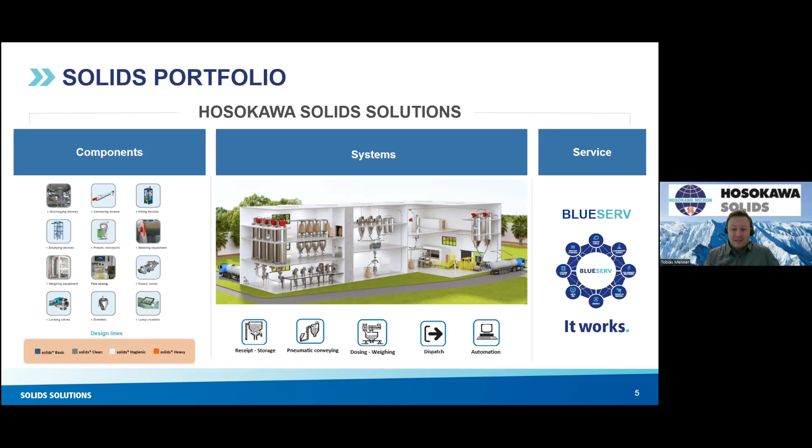So enough with self-advertising. Let's drop into the pneumatic conveying systems. Let me introduce our main technology here. What are pneumatic conveying systems and what types are there?

First of all, a pressure difference is needed, which generates a gas stream to carry or push the particles. A closed system causes a closed gas stream to transport the particles to their receiving system, and suitable bulk material, of course, is required, along with a destination where it should be transported to.

The conveying concepts differ mainly in the possible pressure difference, velocity, or loading degree - the number of particles in a specific amount of air. There are basically two different main types for pneumatic conveying: dilute phase conveying and dense phase conveying.

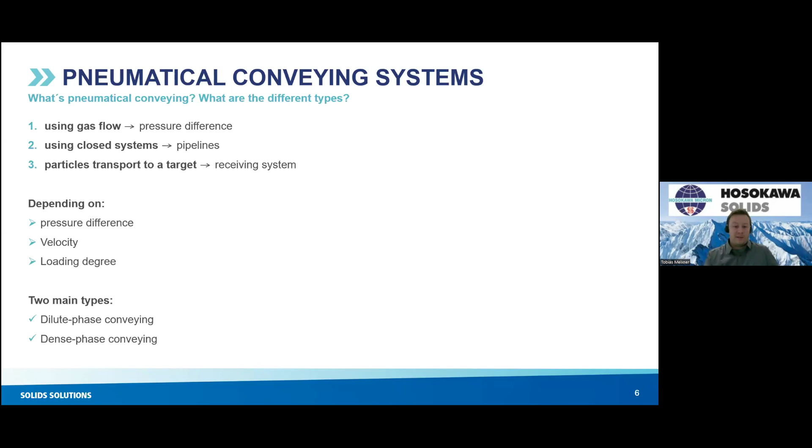Many things influence the decision for or against different conveying systems, such as bulk material properties: flowability, fluidizability, air retention capacity, wear behavior, and the fragility of grains, as example spray granules, pellets, or even friction-sensitive bulk materials. Also the ability for forming deposits or layers in the pipeline.

Also, the operating conditions can influence the decision on which system fits here: the specified mass flow rate, conveying distance, continuous or batch conveying, the batch accuracy especially in dosing systems combined with pneumatic conveying, ATEX regulations or requirements, and others like climate factors in Asia or outside a building.

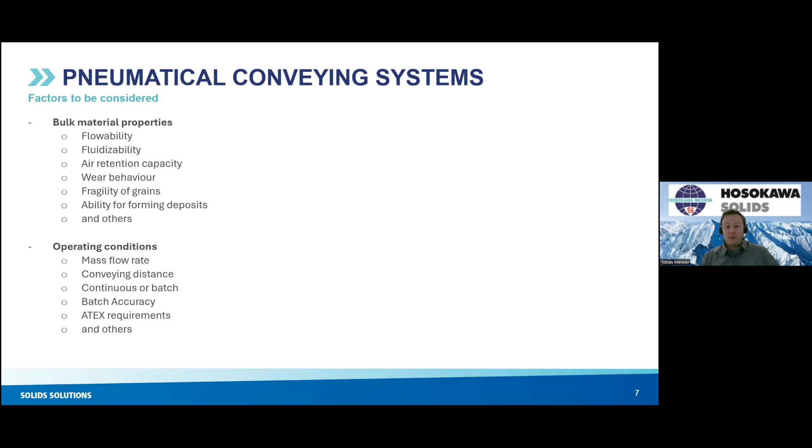For our pneumatic conveying systems, we have developed various conveying systems to meet nearly every requirement on the market. It is important to us to find out the real problems and to question them analytically. This may also result in concepts and solutions that deviate a little bit from these, which are then tailor-made for bulk goods, bulk solids, and customer-specific purposes, and are constantly being developed further.

I will fly over several concepts here and drop into three of them in the next slides. Our Solids Fly Pneu system is a classic dilute phase conveying system for vacuum and pressure operation, for standard conveying tasks, medium distances, and no special requirements to the conveying and the grain handling.

The Solids Fluid Pneu and the Solids Vacu Fill are for conveying of powders, for good fluidizable bulks, lower requirements to the handling, and for short to medium distances.

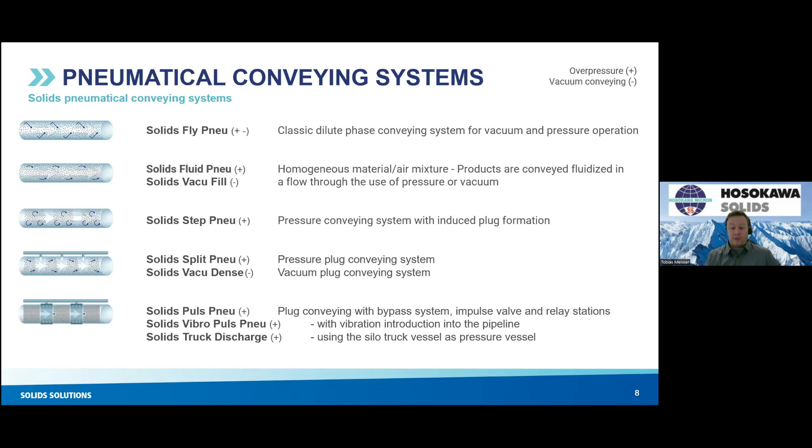In the following, I will explain the characteristics of three systems: the Puls Pneu system, Vacu Fill, and pneumatic truck discharge.

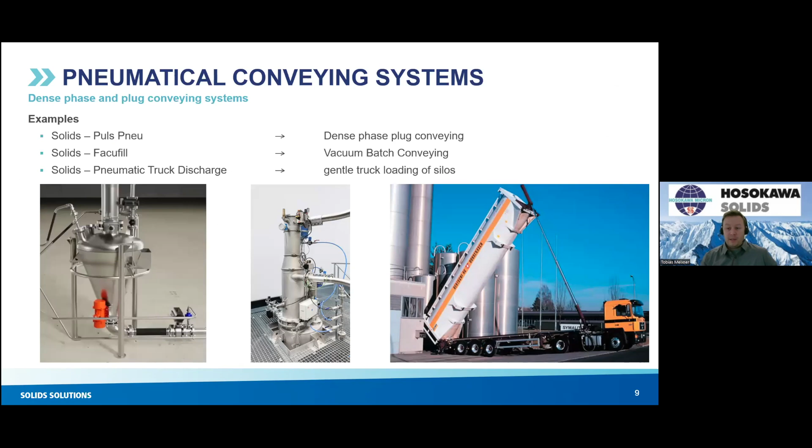As said before, we'll start with the Puls Pneu system with a shorter video. Our Solids Puls Pneu plug conveying system is fitting if gentle conveying is needed, and other special challenges are specified. In the following, the newly created video is perfect to take a look inside the system and explain how it works. I will start now.

The material or the bulks—I have to make this, otherwise I hear the music behind it.

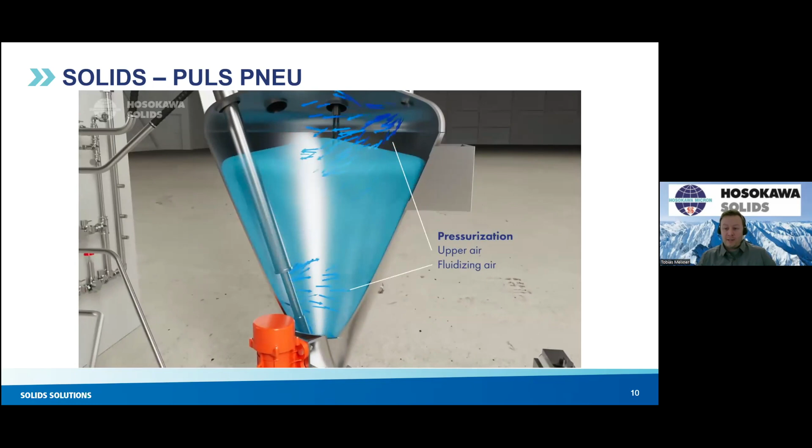Material is filled via the pre-system silo or hopper and through an opened pre-closer flap into a pneumatic sender vessel, which after filling is closed pressure tight. Air for fluidization and pressurizing is led into the pressure vessel, and the product will automatically begin to flow into the pipeline in a dense and fluidized mode.

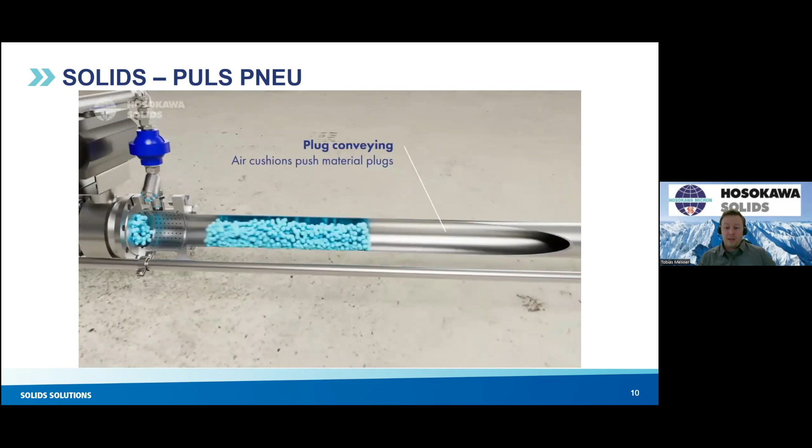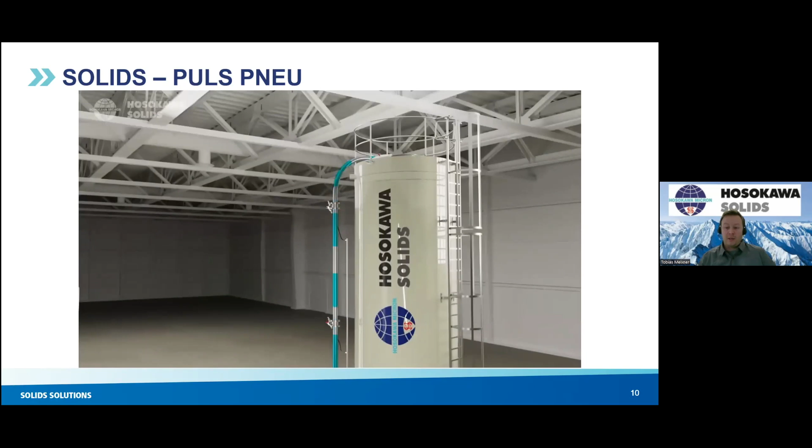An impulse valve here separates the product flow into material plugs and air cushions by a ring nozzle with pressurized air, and relay stations every 6 meters ensure that the air cushions keep the plugs separated and clogging-free conveying is ensured.

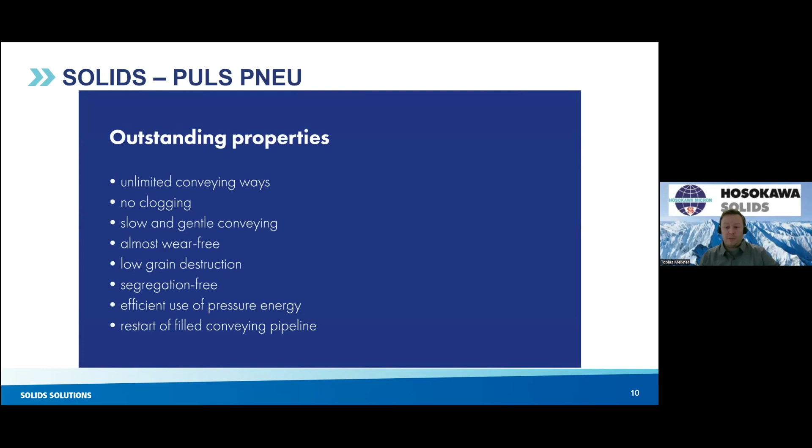The system comes with the following advantages: nearly unlimited conveying routes are possible; no risk of clogging or blocking of the pipeline; gentle and wear-free conveying, with nearly wear-free conveying by extremely low velocity of about 7 to 10 meters per second; segregation-free conveying for mixtures; and finally efficient use of the pressure energy with very high loading degree and use of pressurized air.

Also, the restart of filled pipelines after a stop, pressure loss, or emergency stop is possible with the Solids Puls Pneu system, thanks to the relay stations.

The second system, our Vacu Fill system, is suitable for short conveying lengths and products that can be easily fluidized or have to be conveyed gently or without segregation. Same task as before, but this is all in vacuum mode. The extremely low height of the feed system, in principle a small hopper with fluidization, is perfectly suited for low installation heights or lack of space.

The bulk material is sucked via vacuum into the conveying line via the feed hopper by fluidization of the bulk, and a false air valve divides the product stream into plugs and air cushions.

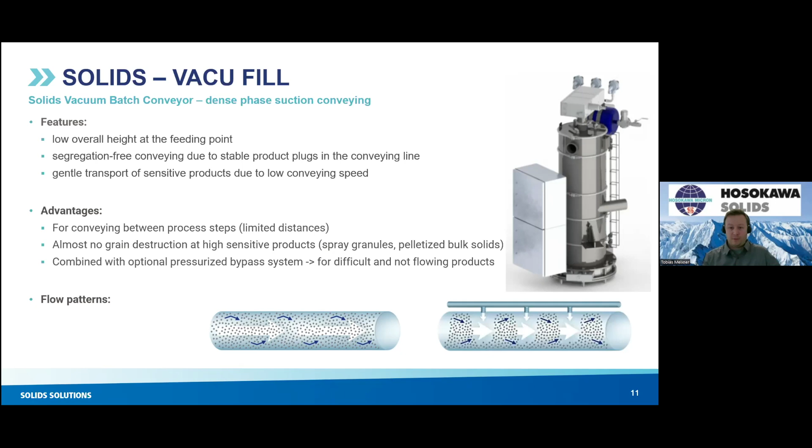The third system I want to introduce is our pneumatic truck discharge system for silo filling of bulk solids from trucks. The truck tank itself is used as a pressure vessel, and its function follows the same principle as the Puls Pneu system, but much bigger here.

An impulse valve and the silo filling line, as well as a secondary line with pressurized air and relay stations, are required for the silo filling line.

Segregation-free and gentle conveying, or the addition of dry air or nitrogen to the truck, is possible with this system, which is principally a pneumatic installation and pipeline system combined with pressure generation and, optionally if needed, an air dryer.

Sensitive bulk materials and hygroscopic bulk materials can be conveyed without grain destruction. This prevents the formation of fine dust between the grains and thus prevents the absorption of moisture and the recrystallization of hygroscopic bulks.

This is our solution we developed in the 1970s for urea handling, in German Harnstoff, which was not meant to be handled in silo storage until around 1970. We now have about 50 to 100 systems worldwide in perfect operation without problems. By continuously flushing the silo line with dry air when not in use, the line is kept dry and the silo head is protected from condensation at the same time. So this is the main task we have to solve here.

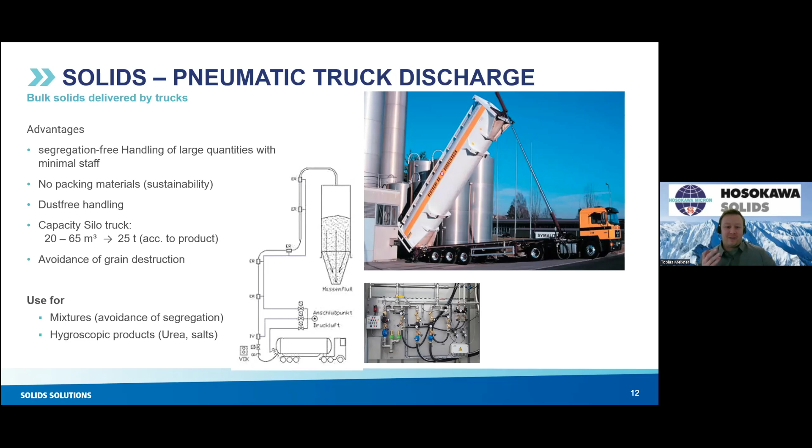Because of the time, I had to shrink my presentation very much, so I could only step into three of the systems. In the end, I want to point out again that all of the briefly explained systems are only one solution for one task at one bulk handling challenge. We will analyze all details first and engineer a perfectly fitting solution for your bulk solids. If you have any questions for me, use the remaining time to clarify this.

That was my presentation for this time. Thank you very much, Mr. Meixner.

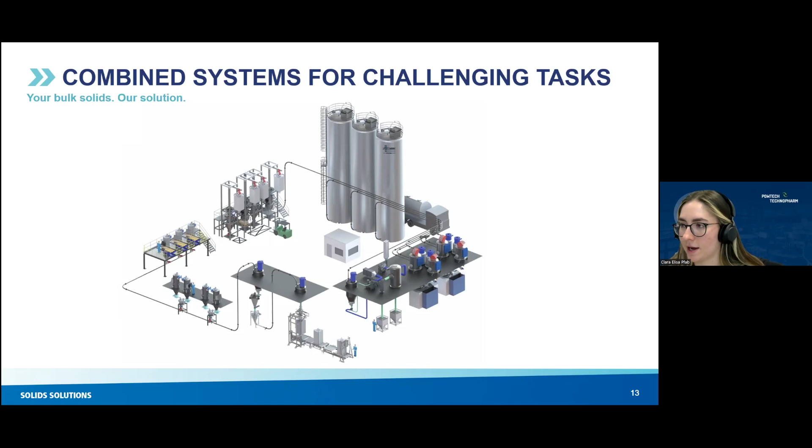I can close the presentation. Yeah, for sure, if you want, or yeah.

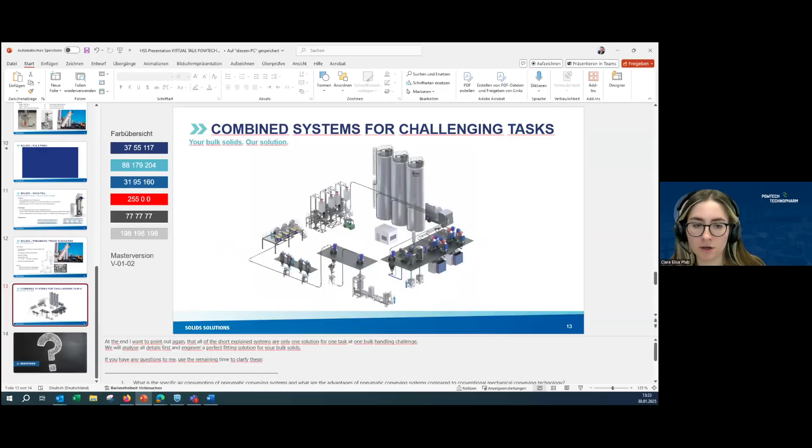Okay, perfect. So let's start with the first question. You mentioned about air retention capacity. How do you measure this?

The air retention capacity is measured by analysis in our laboratory. You can send us a small amount, about 2 to 5 liters, and we will analyze the capacity of holding the air in the powder using our test system. This is one point to be considered for deciding which system is the fitting one.

Thank you for answering. So we have one German question. For this question, we can switch shortly to German and then switch back to English.

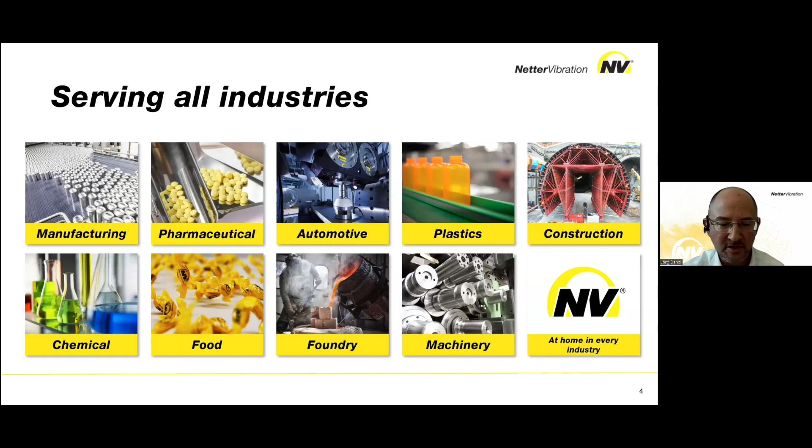The sieving and sorting is a specialized feeding process, let me put it that way. It's important to know that all those applications mentioned here occur in all the industries I've shown you on the slide before.

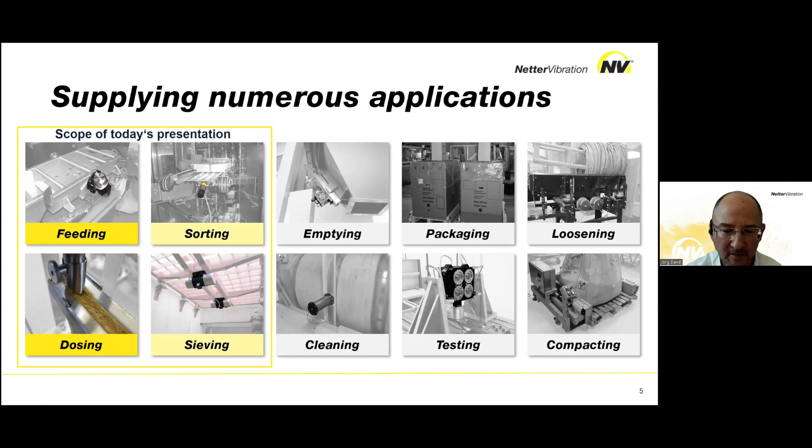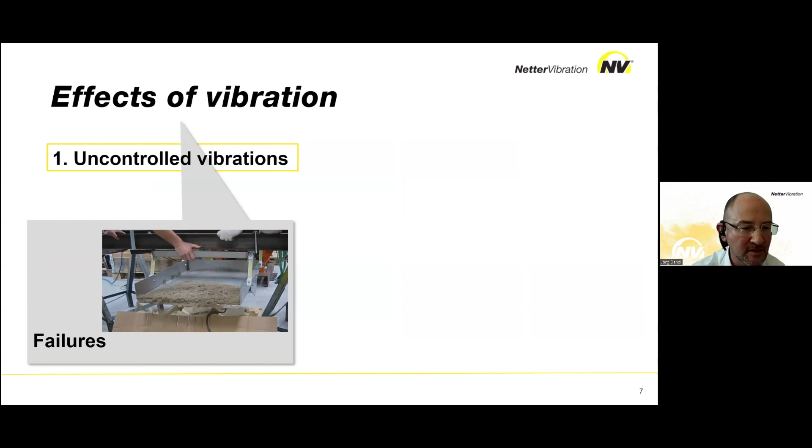As I already announced, we have to deal with a few basics in vibration technology to understand how feeding and conveying of different materials works. Unfortunately, we are sometimes confronted with customers who contact us and try to use vibrators and this technology, but the conveyors and the feeding process are not sufficient because of a not well-designed construction. If you have a closer look, I'll repeat the video again: the feeding is not sufficient, and when the colleagues bring more pressure and stiffness to the whole system, the feeding suddenly works. So overall, the system is not stiff enough to feed the material here.

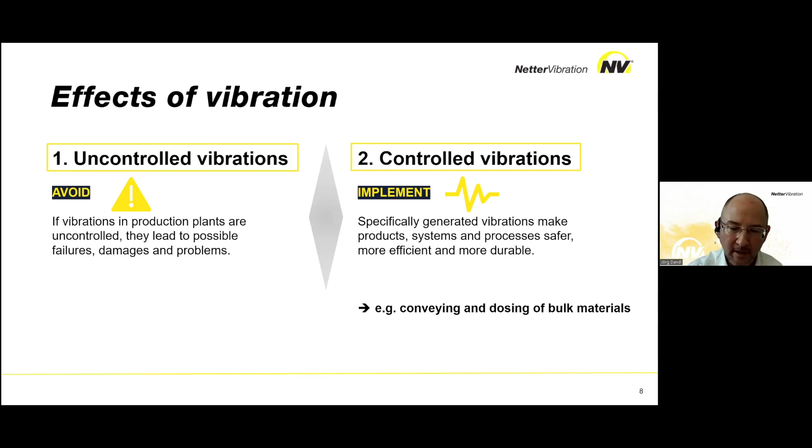So we're going to now have a closer look at conveying and dosing systems for bulk material. There are general questions that have to be answered to design a conveying system: what is the overall purpose—is it dosing what is needed, or constant feeding of a machine or process? What are the typical loads the conveyor has to handle? Is it coarse material in primary industry, or fine powder in pharmaceutical industry? Is it demanding material, or probably a hazardous substance? These questions have to be answered in conjunction with the customer's needs.

The conveying systems are kind of limited. We can design them up to 20 meters in length, and we overbridge them with several conveyors to reach that. Typically our conveyors are between 2 to 4 meters in length and probably less than 1 meter in width.

Typical questions which have to be answered to design such a conveyor are: what type of vibrator is used, pneumatic or electric, what dimensions are needed, what's the material, what's the weight of the material, what throughput is needed from the customer side, and so on.

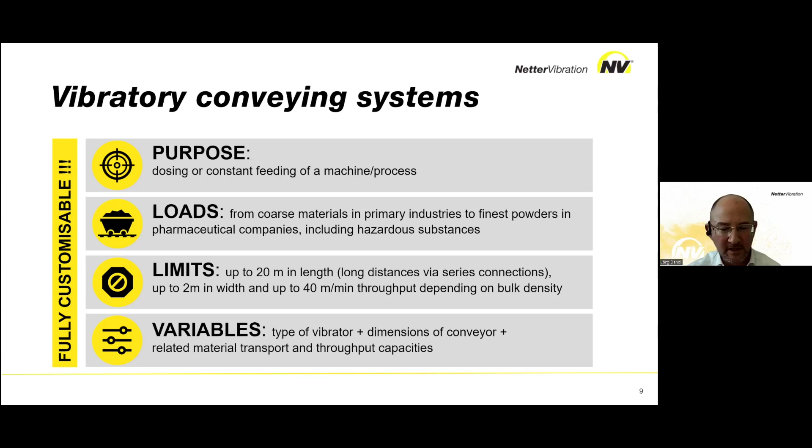The typical components of a conveyor system are the trough, the base frame, certain mountings, the suspension between tray and frame, and the device, the vibrator, electric or pneumatic. Additionally, we offer a lot of accessories and options the conveyor can be supplied with.

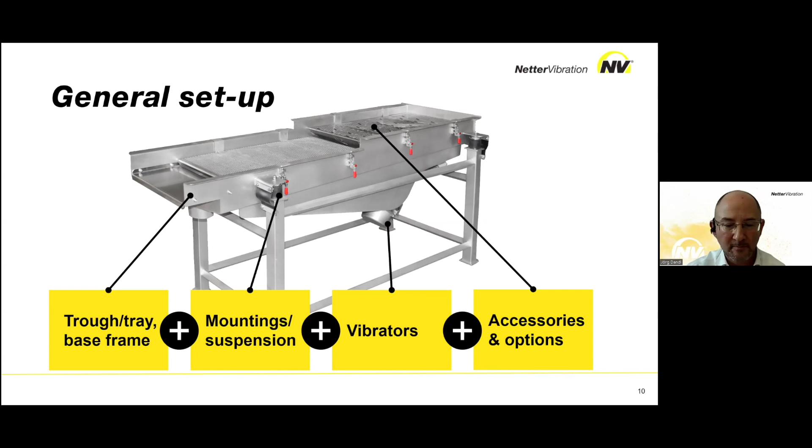Let's have a closer look at typical questions to be answered. What material should the conveyor be of? Is it steel, is it stainless steel, what is needed? Has the conveyor got to be resistant to heat, to certain chemicals, to demanding materials? Easy to clean, like in food industry?

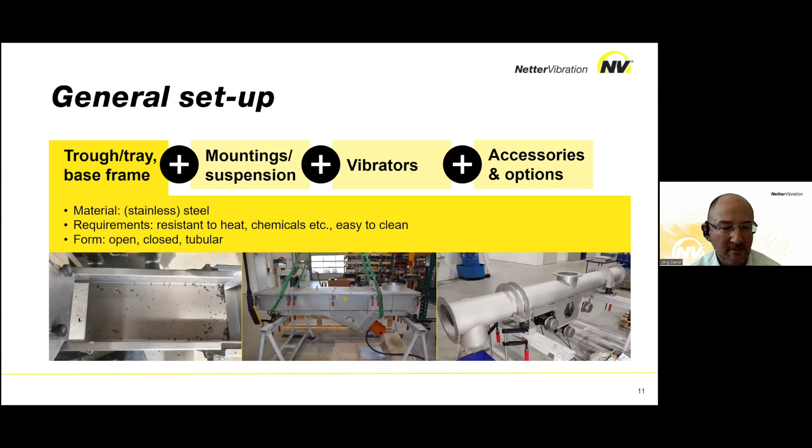Which form is needed? Can it be open, or does it have to be closed because of hazardous materials? Is a tubular conveyor needed, driven by vibrators? Sorry for that - that's the typical questions which have to be answered.

Next question: what's the perfect spring for the application to avoid uncontrolled vibration - coil springs, blade springs? The main goal is to find optimal isolation from tray to base frame and to find the best frequency and amplitude balance to feed the material.

Another important question: what vibrator should we use? If there's only air available at the customer's site, pneumatic is the choice. Or depending on the application, electric vibrators are the best choice here.

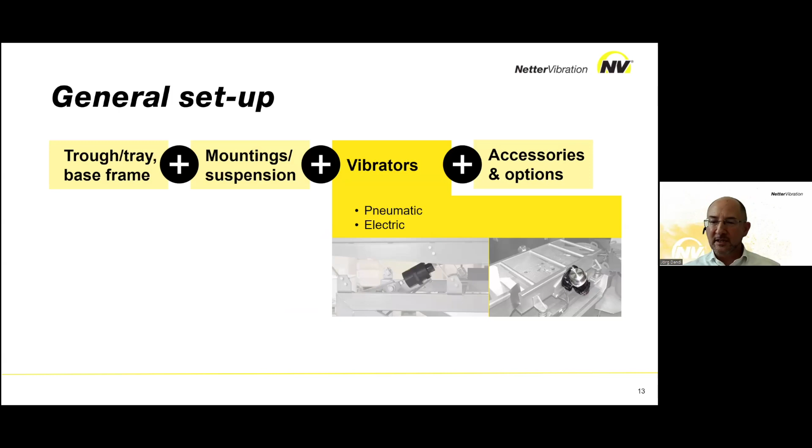And last but not least, several accessories like electronic or pneumatic controls to handle frequency and amplitude, different fasteners, bolts, gaskets. We also supply conveyors with sieves or screens. Some applications need heating plates to dry the material within the process. So a lot of questions to be answered in cooperation with our customers.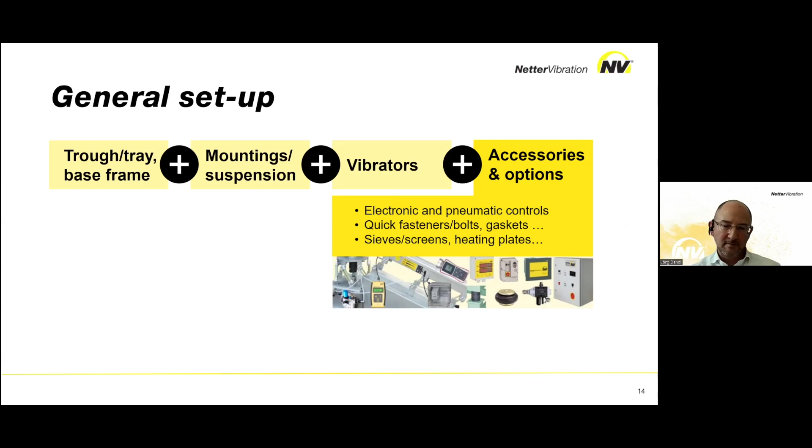So how does vibration work in principle? We throw the material into the conveyor, driven by the vibrator underneath or at the side. We play a little bit with frequency, we play with amplitude, and of course with the size and power of the vibrator.

Sometimes we need a fine throw for discharging or dosing of material. Sometimes we need a large throw for sieving or drying material. Basically, the material is more in the air than in contact with the conveyor itself - that's the principle of how vibration works in conveyors. We call that micro bounces.

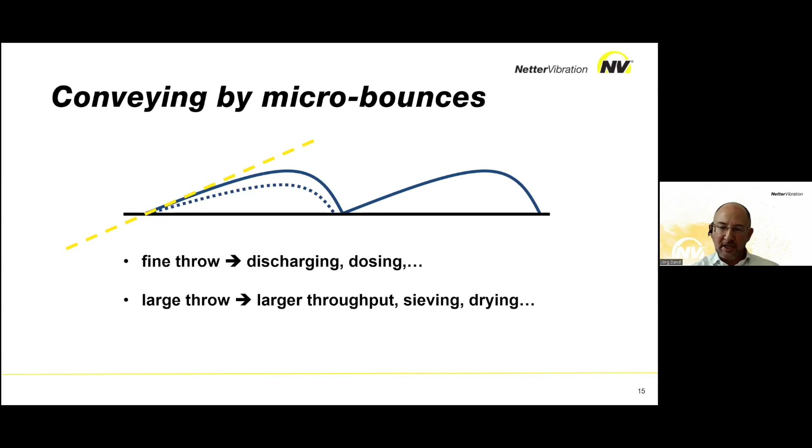The typical project challenges we are confronted with are: is compressed air available? Does the conveyor need to be started or stopped immediately for dosing, for instance? Do you need to change the amplitude or the frequency? Probably you have different materials to handle - one day one material, the other day another - and the requirements to handle those two different materials are different, so you have to adjust the frequency and amplitude to get an optimal result.

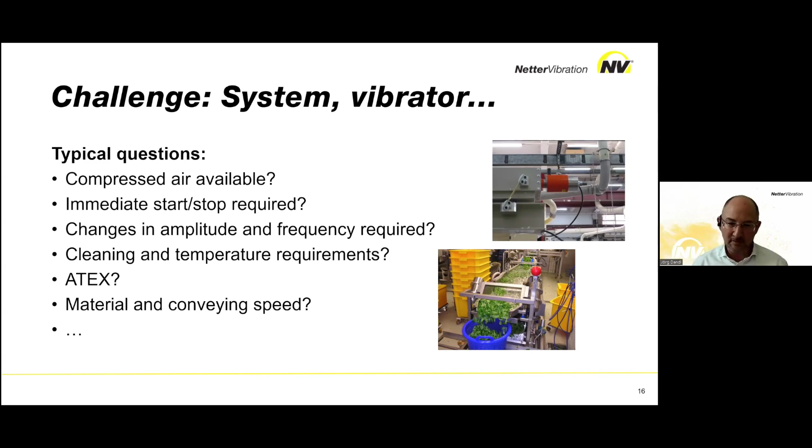Are there any requirements concerning cleaning of the whole system? Any requirements for special temperatures? Is there an ATEX requirement at the customer side? What's the material - is it a hazardous material? What conveying speed is needed, what conveying capacity is needed? Similar questions which have already been asked to Tobias in his presentation.

Also things which have to be answered: we have to find the right balance between stiffness of the whole system and weight of the whole system. If it's not stiff enough or rigid enough, we get some issues with the material handling - I showed the video before, you probably remember that. Secondly, we have to find the right place where the vibrator has to be located on the whole conveyor system. So we do simulations in our computer system to test the stiffness or rigidness and where to place the vibrator device ideally.

So enough theory, I guess, here. Let's go ahead and have a closer look at some samples I brought with me from the last years.

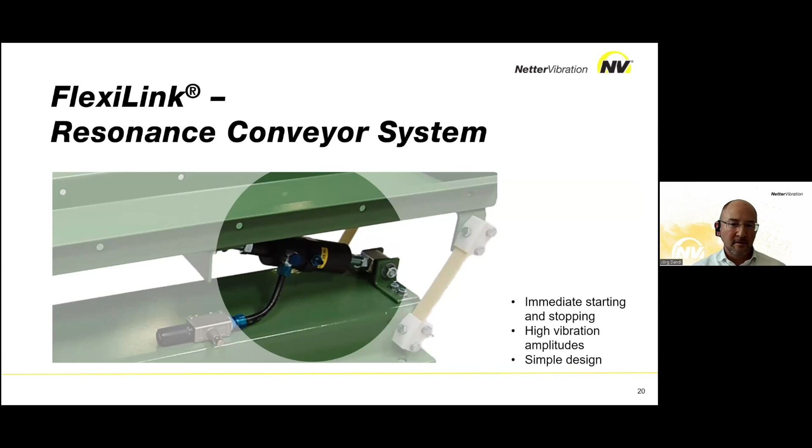In principle, this is a resonance conveyor system. The device is a pneumatic vibrator, and we use blade springs here. The vibrator is connected to the base frame, and with this system we achieve high vibration amplitudes. Another advantage is the feeding starts and stops immediately if the pneumatic air is switched off.

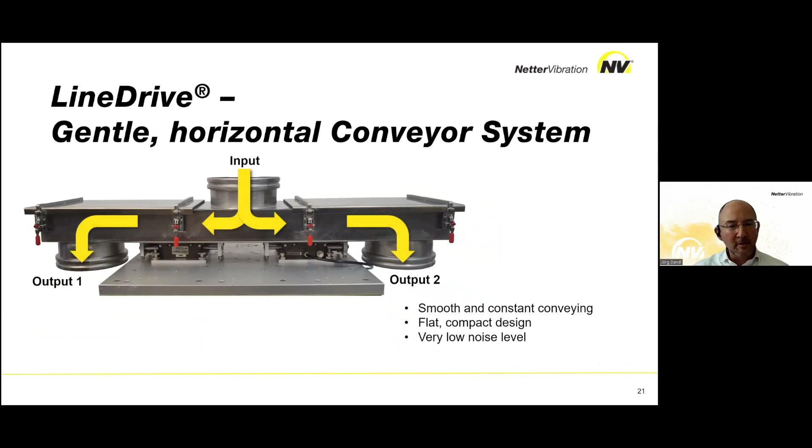Another sample, what we call line drive - it's a horizontal conveyor system. You have one input in the middle and two outputs. It's used, for instance, to fill big packs with material. If one big pack is fully filled, you switch to the other side, and the material flows to the empty big pack. So this is a horizontal conveyor system with two outlets.

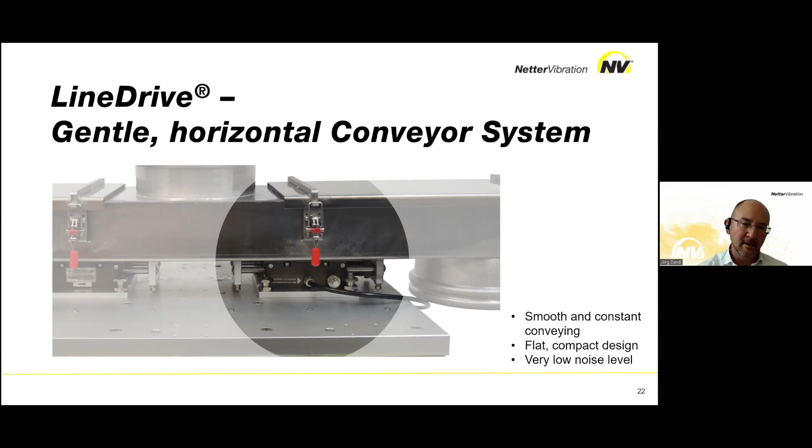Very smooth and constant conveying, very flat in design, and very low noise level. So for conveying ceramic waste, we use these kind of conveyor systems.

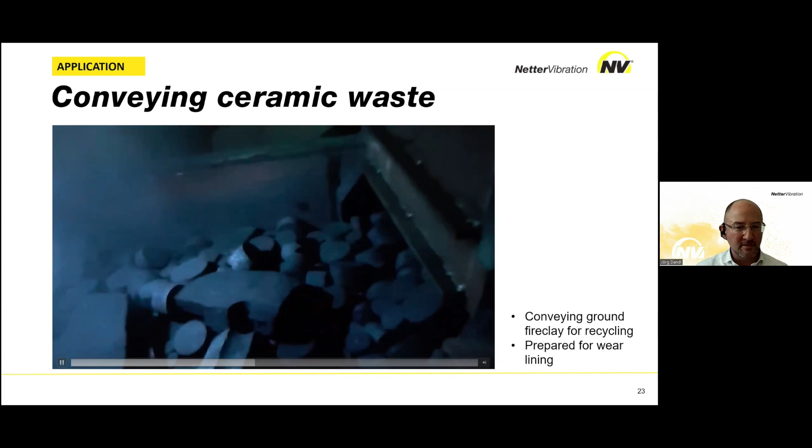Here we have ground fireclay, which is handled for recycling process. That's the conveyor after it was manufactured, and here we see the process. Sorry for the little dark video, but I think you understand the principle.

Here a lot of conveyors which are mounted in serial just to overbridge a certain distance. Some in the middle we have a conveyor which has a sieve mounted, and the more or less larger materials are handled in the different conveyors afterwards.

We can interchange screen attachments of different sizes, so you can sieve different grain materials. It's suitable for ATEX as well. It's made of stainless steel in this case, for the customer we supplied last year.

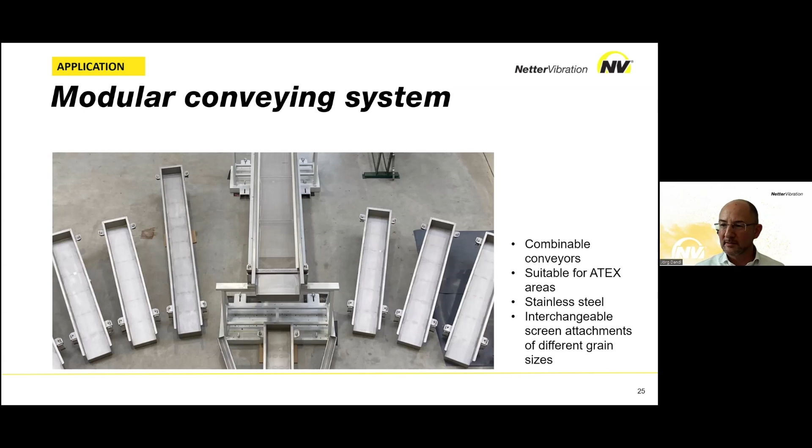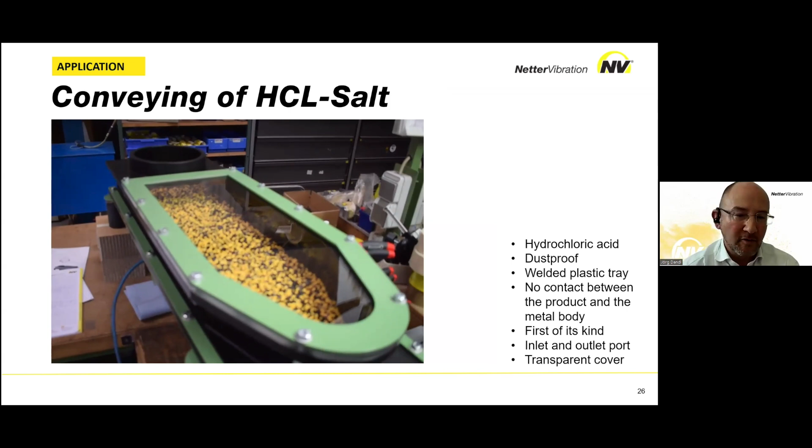Another demanding application is conveying of hydrochloric acid. The conveyor this time is made of plastic. We have one inlet and one outlet. It's a closed system.

We surely tested it with some plastic pellets, not with the hydrochloric acid, but the whole system is dust-proof and very suitable for this application.

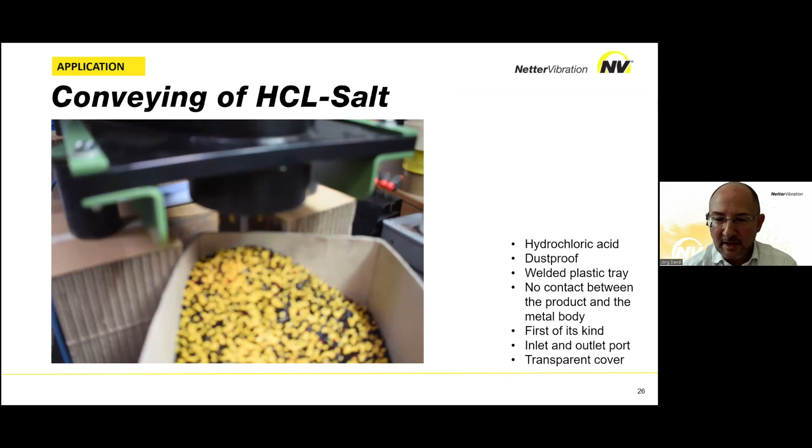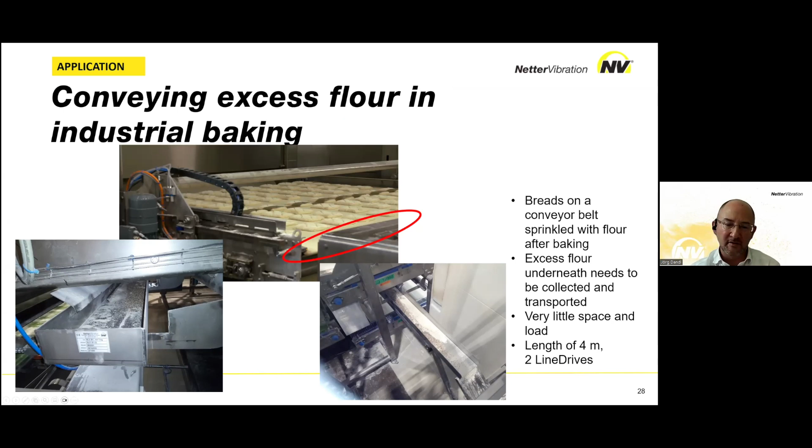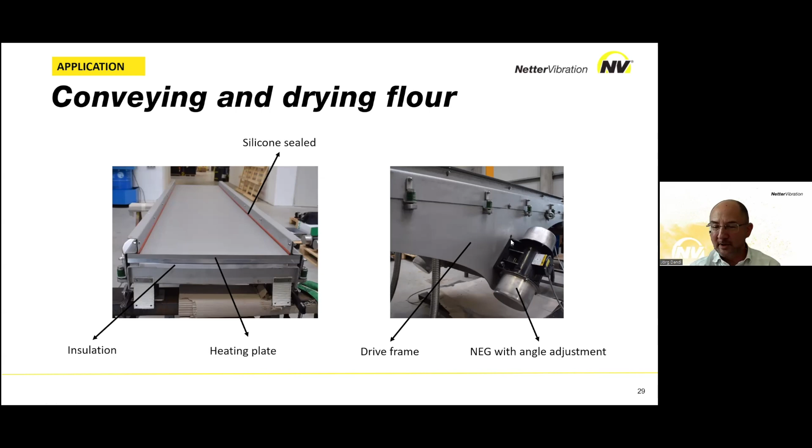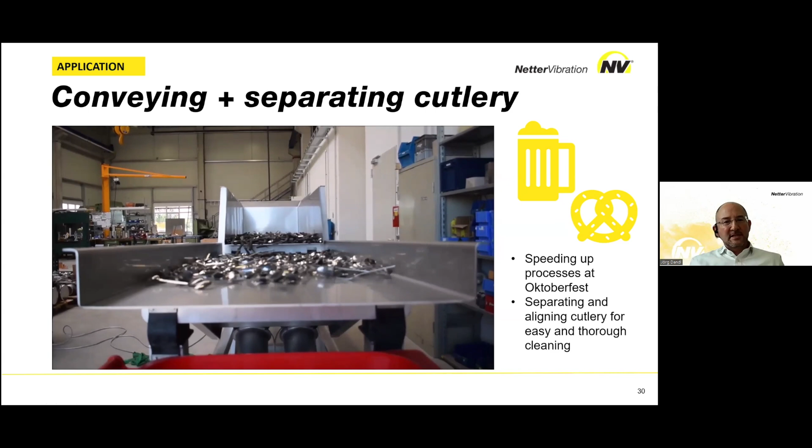Another crazy thing we did, a customer from Oktoberfest, a brewery, asked us how can we separate cutlery after it has been used in one of the tents at Oktoberfest to get a more efficient dishwasher process afterwards.

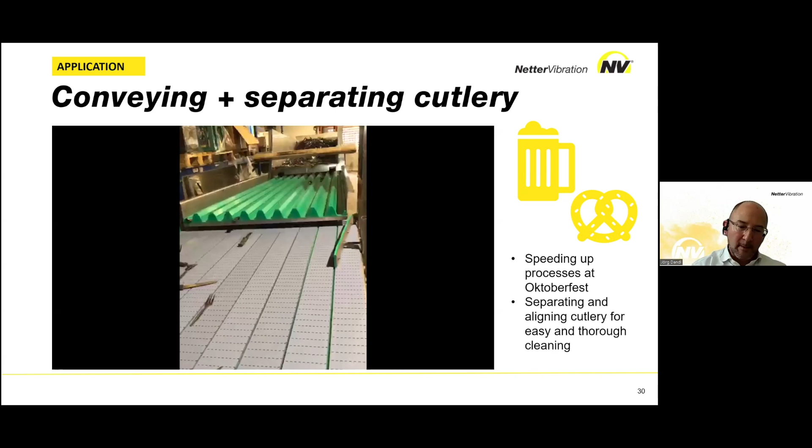In the past, they had to separate the cutlery manually. It just came to the washing department, and they had to separate it. We designed a conveying system where you can just put all the cutlery at one side and get the cutlery separated on the other side, and then it was fed into the dishwashing machine afterwards. A project from last year.

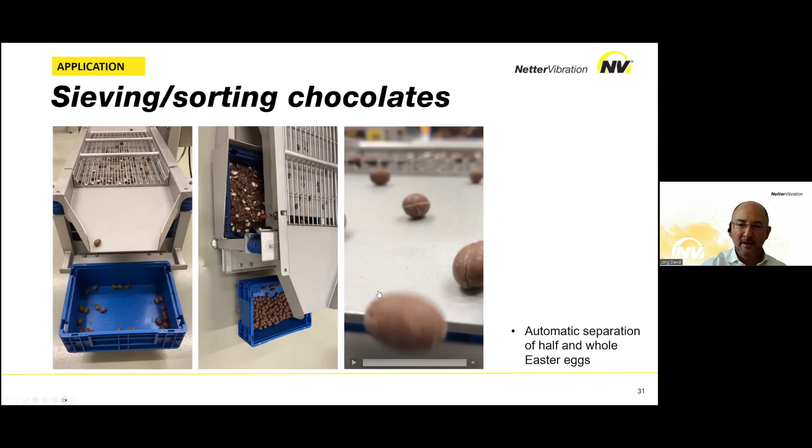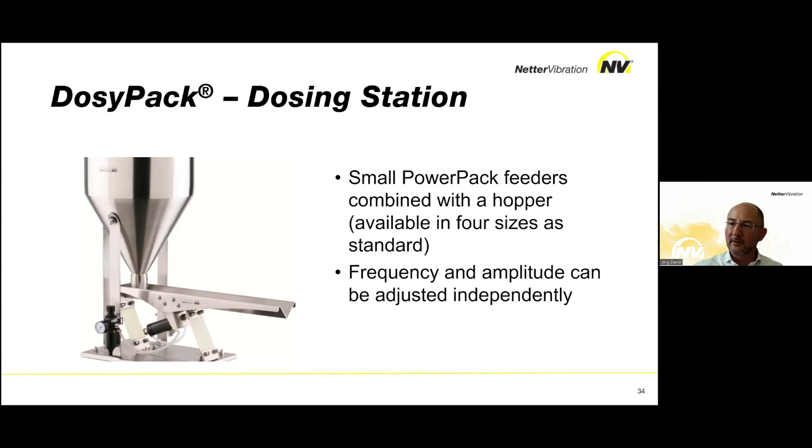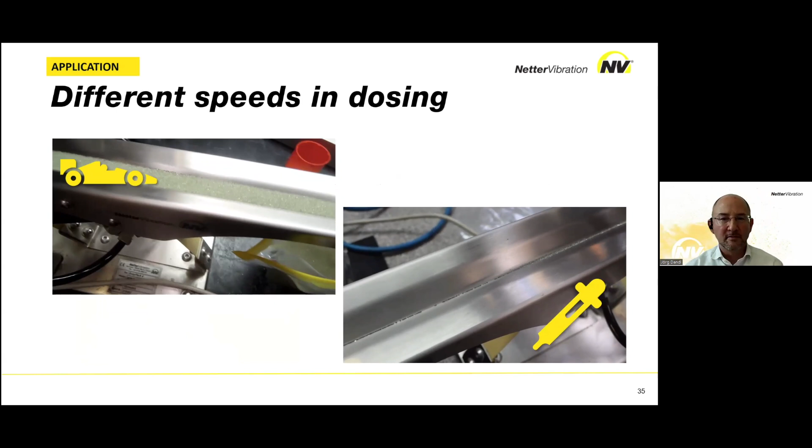Frequency and amplitude can be adjusted independently to speed up the dosing, or whatever you need. Here are some sample videos: on the left-hand side you see fast dosing, and on the right-hand side a very slow dosing. We can adjust the whole system so it doses piece by piece at the end. I hope you can see that from the video.

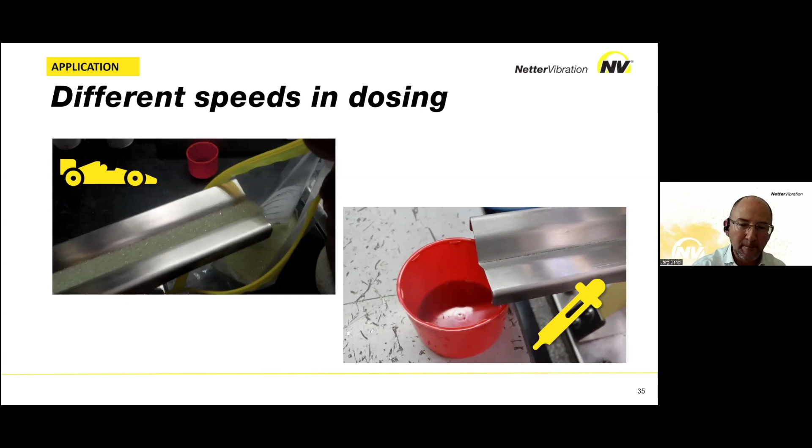So what else can we supply and offer? Sprinkling of spices or flour, like I showed you before in the bakery. That's another application we can offer, with the DosyPack for instance.

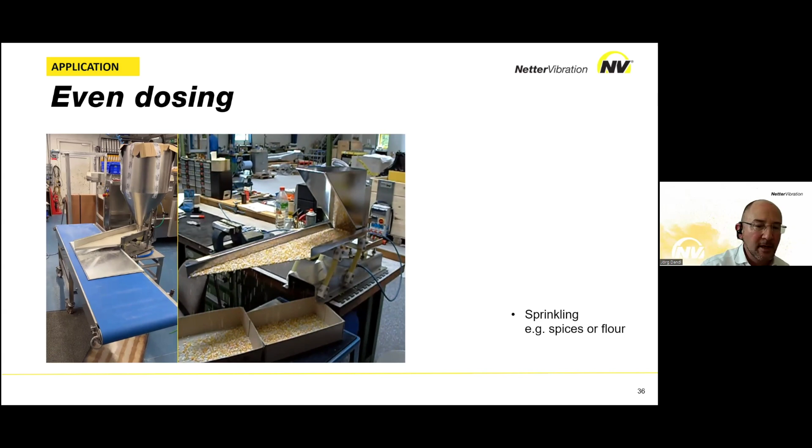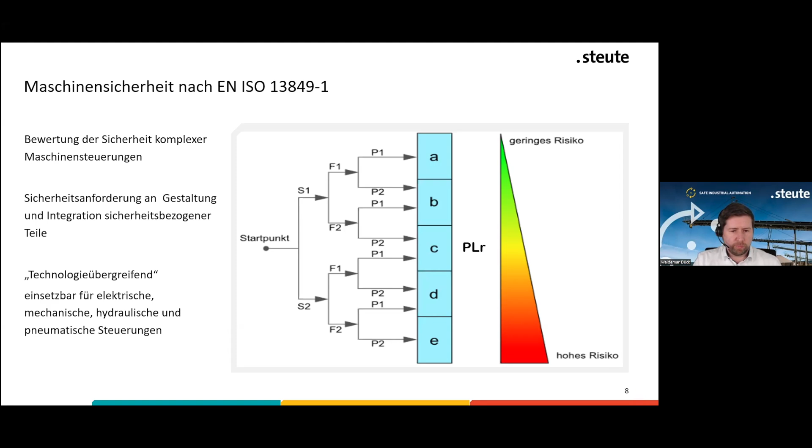Eine Rechnung, um den Performance Level jetzt zu berechnen, werden wir heute nicht durchführen. Das ist einfach zu langwierig und ich möchte Ihnen hier nur zumindest aufzeigen, welche Verantwortung wir als Steute tragen, damit Ihre Anlagen einen hohen Performance Level für hohe Sicherheit erreichen können.

Um den Performance Level eines Systems zu ermitteln, muss der MTTFD-Wert errechnet werden. MTTFD bedeutet Mean Time to Dangerous Failure. Einfach ausgedrückt gibt er an, wie lange ein sicherheitsbezogenes Bauteil oder System im Durchschnitt fehlerfrei arbeitet, bevor ein gefährlicher Ausfall auftritt. Ein höherer MTTFD-Wert steht für eine längere Lebensdauer und geringes Risiko eines Ausfalls und trägt somit zu einer hohen Zuverlässigkeit bei.

Um den MTTFD-Wert zu berechnen, benötigt man unter anderem den B10D-Wert. Dieser Wert sagt aus, bei wie vielen Schaltzyklen 10% der Bauteile einen gefährlichen Ausfall aufweisen. Dieser Wert wird vom Hersteller, also von Steute, spezifiziert.

Der B10D-Wert wird durch die Lebensdauertests und die dazugehörige Fehleranalyse bei uns im Hause ermittelt. Je höher der B10D-Wert ist, desto höher ist am Ende das Ergebnis des MTTFD-Wertes für eine hohe Zuverlässigkeit des Produktes. Somit sind wir als Hersteller im Umkehrschluss für einen hohen Performance Level verantwortlich.

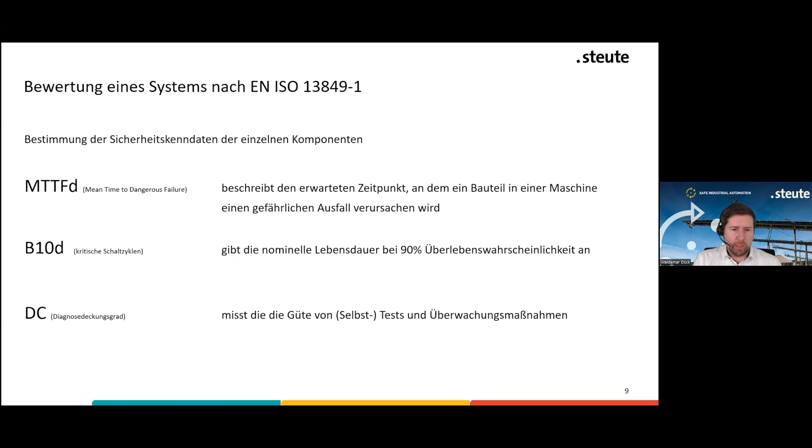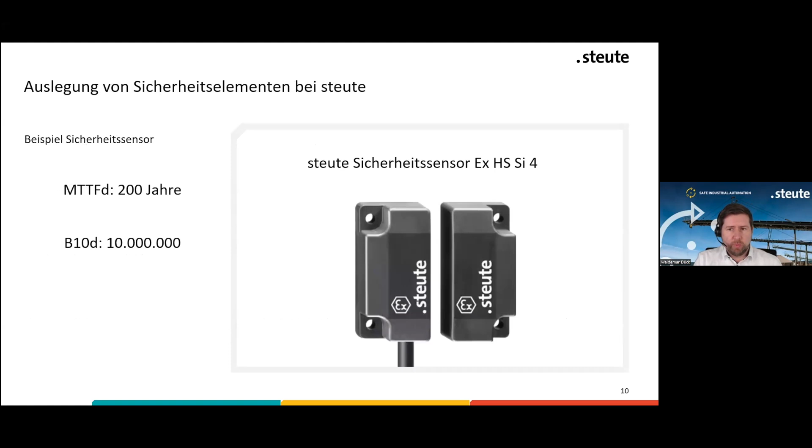Hier ein Beispiel an einem Steute-Sicherheitssensor für den Ex-Bereich, welche MTTFD-Werte erreicht werden können durch eine hohe Auslegung unserer Produkte. Der B10D-Wert unseres Sicherheitssensors liegt bei 10 Millionen Schaltzyklen. Damit und mit weiteren Faktoren errechnet sich der MTTFD-Wert, der bei 200 Jahren liegen würde. Damit können in Verbindung mit weiteren Faktoren unsere Produkte Performance Level D oder gar E erreichen, somit die höchsten Anforderungen.

Kommen wir zum Thema Explosionsschutz.

Zuerst kurz zu den Grundlagen des Explosionsschutzes: was braucht man, um eine Explosion überhaupt zu erzeugen? Erstens brennbare Stoffe, das kann festes, flüssiges oder gasförmiges Material sein. Zweitens Sauerstoff. Und drittens braucht man einen Zündfunken, um eine Explosion auszulösen. Das ist die Voraussetzung für eine Explosion.

Die drei Explosionsschutzarten, die vorhanden sind: einmal der primäre Explosionsschutz - wie verhindert man überhaupt, dass eine Explosion oder eine explosive Atmosphäre sich bildet? Das zweite wäre der sekundäre Explosionsschutz - wie sorgt man dafür, dass gar keine Zündquelle vorhanden ist? Und der tertiäre Explosionsschutz - wie sorgt man dafür, dass eine bestehende Explosion gestoppt oder begrenzt wird?

Fangen wir mit dem Primärschutz an: Verhinderung, dass eine explosive Atmosphäre überhaupt entstehen kann. Wir haben gehört, man braucht 3 Bestandteile gleichzeitig für eine Explosion: brennbaren Stoff, Sauerstoff und eine Zündquelle. Und all das muss auch in der richtigen Menge vorhanden sein.

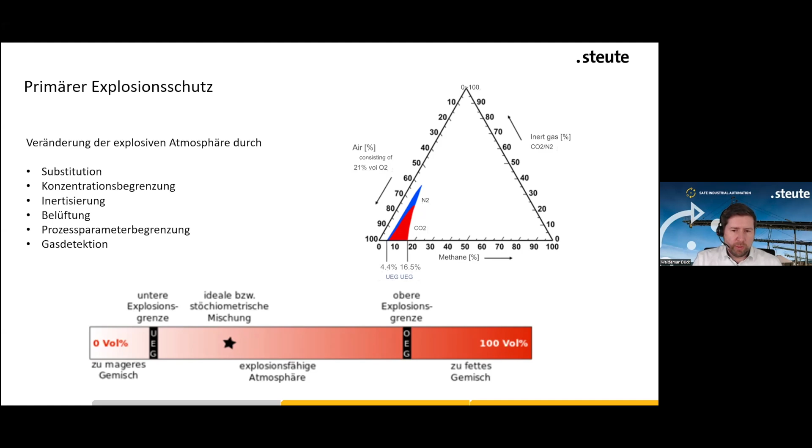Alle elektrischen und mechanischen Geräte, die im Ex-Bereich eingesetzt werden, müssen den entsprechenden Ex-Schutzklassen entsprechen, um die Entstehung von Zündquellen zu verhindern. Ich möchte heute nur auf einige der Schutzklassen zu sprechen kommen, da alle den Zeitrahmen sprengen würden.

Wir haben hier die druckfeste Kapselung, Kennzeichnung D. Die Komponenten, die eine Zündung auslösen können, sind in ein Gehäuse verbaut, das dem Explosionsdruck standhält. So wird eine Übertragung der Explosion nach außen verhindert. Spezielle Konstruktionen der Gehäuse, Werkstoffe und Dichtungen sorgen dafür.

Dann haben wir noch den Explosionsschutz durch Gehäuse, Kennzeichnung T. Das Gehäuse verhindert das Eindringen von Staub, der im Inneren eine explosionsfähige Atmosphäre bilden kann. Geeignet somit für staubexplosionsgefährdete Bereiche.

Und als letztes erhöhte Sicherheit, Kennzeichnung E. Entstehende Funken oder hohe Temperaturen werden zum Beispiel durch Gehäuseaufbau und Werkstoffe verhindert, denn auch hohe Temperaturen am Gehäuse können eine Zündquelle sein.

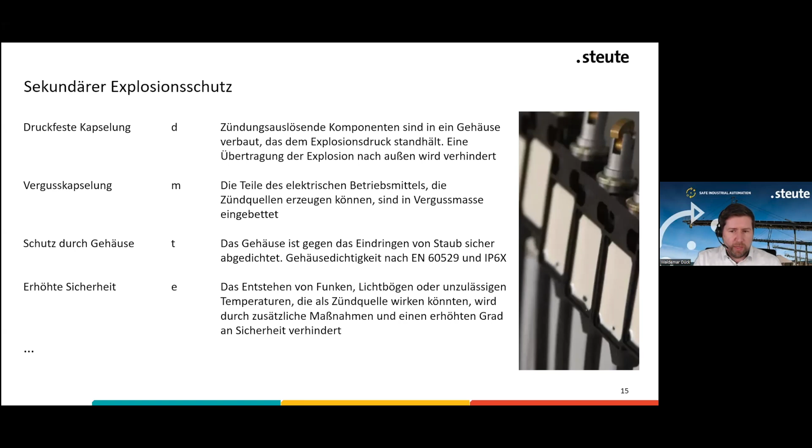Weitere Schutzarten, die es noch gibt, werden wir aus Zeitgründen hier einfach nicht weiter erwähnen.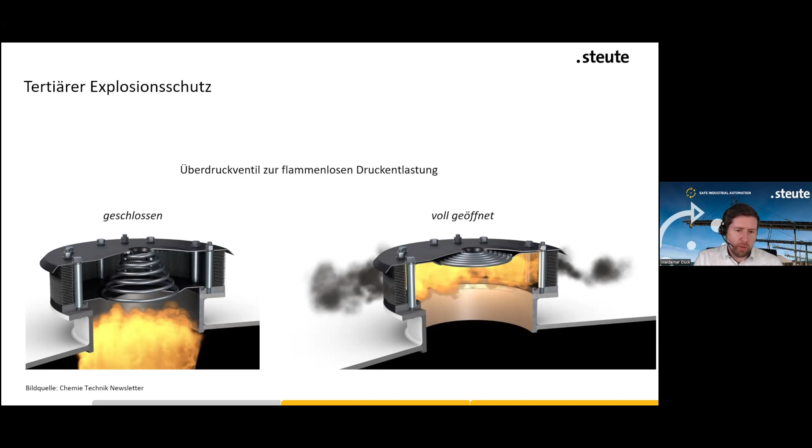Das waren somit die drei Explosionsschutzarten. Für steute Technologies ist der sekundäre Explosionsschutz anzuwenden. Unser Ziel ist es, Zündquellen in Schaltgeräten und Sensoren zu eliminieren oder zu isolieren, um Explosionen in gefährlichen Bereichen zu verhindern.

Ausschlaggebend für die Einteilung ist die Dauer und die Häufigkeit einer zündfähigen Staubatmosphäre. Wir haben im Staubbereich die Ex-Zone 20, das ist ein Bereich, in dem ständig oder über längeren Zeitraum eine explosionsfähige Staubatmosphäre vorhanden ist. Wir haben die Zone 21, die aussagt, dass unter normalen Betriebsbedingungen gelegentlich eine explosionsfähige Staubatmosphäre auftreten kann. Und die Ex-Zone 22 sagt aus, dass unter normalen Betriebsbedingungen nur selten oder zumindest kurzzeitig eine explosionsfähige Atmosphäre auftreten kann.

Diese Einstufung ist die Grundlage für alle weiteren Schutzmaßnahmen. Hier dürfen nur für den Bereich zulässige Betriebsmittel eingesetzt werden.

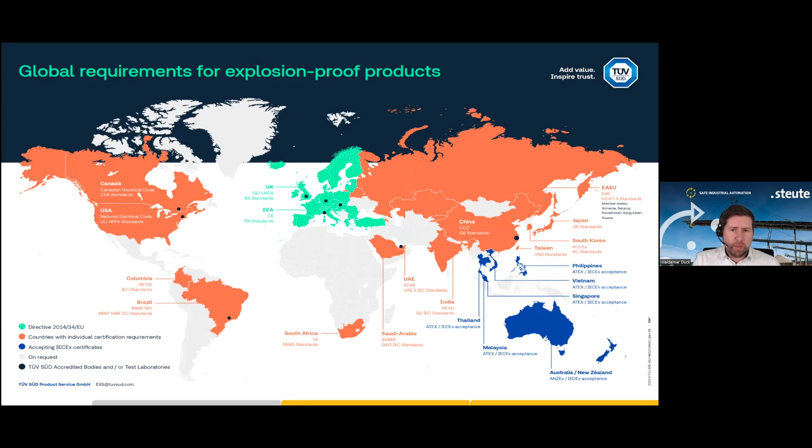Den Prozess hinter einer Zertifizierung möchte ich heute nicht erklären. Um Produkte nach ATEX- oder IECEx-Richtlinie herstellen zu dürfen, müssen nicht nur die Produkte zugelassen werden, sondern auch der Hersteller mit der Produktion und der gesamten Prozesskette. Die Prüfung erfolgt durch notifizierte Prüfinstitute wie DEKRA oder TÜV und muss regelmäßig durchgeführt werden.

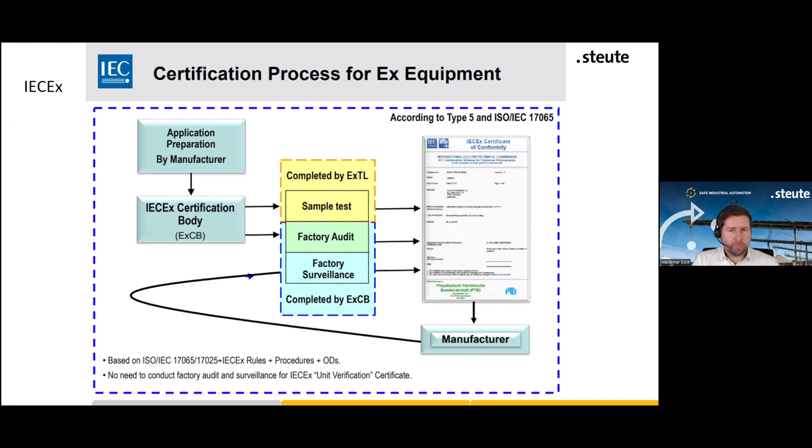Am Beispiel unseres Produktes hier, der Sicherheitszuhaltung, zeigen wir ein ATEX- und ein IECEx-Zertifikat. Je nachdem, wo Ihre Anlagen eingesetzt werden, wird das entsprechende Zertifikat ebenfalls benötigt.

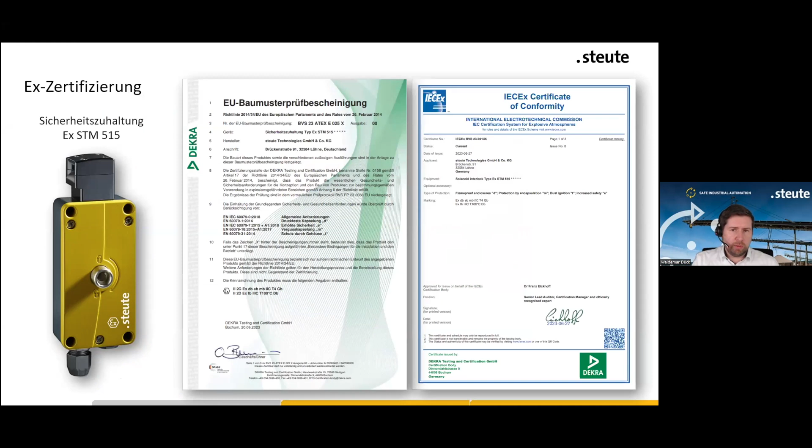Hier noch Beispiele für weitere internationale Zertifikate, für die wir unsere Produkte zertifizieren lassen: CSA für Nordamerika, CCC für China, INMETRO für Brasilien, KCs für Korea und viele weitere.

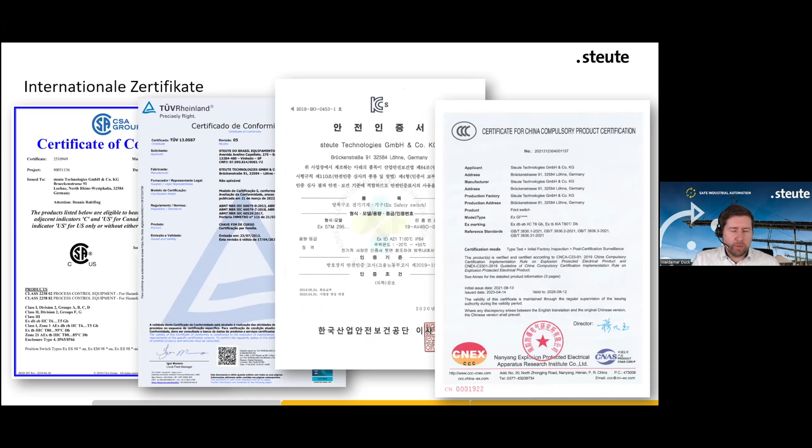Ja, kurze Erläuterung der Ex-Kennzeichnung anhand unserer Ex-Türzuhaltung. Ich beschränke mich hier auf die Kennzeichnung für die Staubatmosphäre. Was bedeutet das eigentlich? Wofür steht das überhaupt?

Also man findet hier eine Zuordnung zu einer Gerätegruppe und nachfolgend eine Gerätekategorie in Verbindung mit den entsprechenden Bereichen G für Gas oder D wie Dust für Staub. Generell die Bedeutung der Gerätekategorie, Gerätegruppe und allen weiteren Kennzeichen findet man in den Tabellen der ATEX-Richtlinien oder auch gerne zusammengefasst für den besseren Verständnis auf unserer Homepage zum Runterladen als Ex-Poster. Das würde ich Ihnen gleich noch aufzeigen.

Nachfolgend haben wir die Schutzklasse, in diesem Beispiel T, Schutz durch Gehäuse, in unserem Fall staubdicht für die Staubatmosphäre. Enthält der Schalter mehrere Schutzklassen, werden diese nacheinander aufgeführt. Die Buchstaben hinter der Schutzklasse, in unserem Fall B, wäre das hier, stehen zusätzlich für die Ex-Zonen. Also A wäre Zone 20, B Zone 21 und C Zone 22.

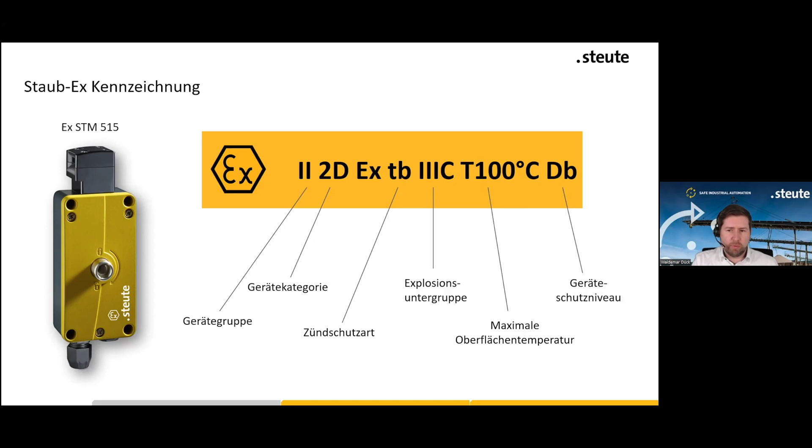Anschließend folgt die Explosionsuntergruppe mit der maximalen Oberflächentemperatur. Die Explosionsgruppe römisch 3c steht für leitfähigen Staub mit 100 Grad Celsius maximaler Oberflächentemperatur des Gehäuses. Ja, und zuletzt folgt das Geräteschutzniveau. Auch hier findet man in einer Tabelle die Bedeutung dazu. In unserem Fall bedeutet das, dass das Betriebsmittel mit der Anwendung in Zone 21 eine ausreichende Sicherheit bei vorhersehbaren Fehlern bietet.

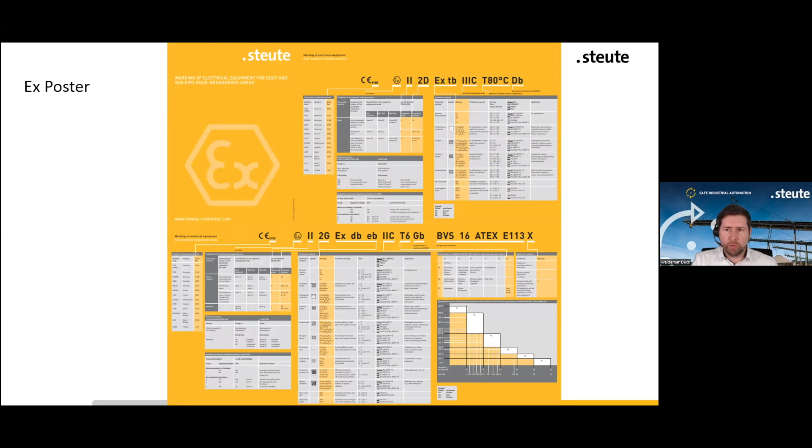Ja, wie vorhin schon angedeutet, die Bedeutung zu der Kennzeichnung finden Sie gerne auf unserem Ex-Poster detailliert und gut nachvollziehbar erklärt. Diese finden Sie kostenlos und ohne Anmeldung zum Runterladen unter Downloads auf unserer Homepage.

Gerne komme ich noch zuletzt auf unsere Ex-Produkte zu dem Thema Schüttgut zu sprechen. Also im Programm haben wir die Seilzugnotschalter für Förderbänder zur sicheren Abschaltung der Förderbänder im Notfall. Das sind einseitige oder auch zweiseitige Ausführungen für maximal 200 Meter Reißleine. Wir haben die Drucktaster oder andere Befehlsgeräte zur Steuerung von Anlagen, Positionsschalter, Induktivsensoren oder auch Magnetsensoren zur Überwachung von Klappen oder Türen oder zu einer Positionsabfrage.

Des Weiteren Türsicherheitszuhaltung zur Verhinderung, dass Personal in bestimmte Bereiche unkontrolliert eintreten kann. Und als Besonderheit haben wir hier unsere Wireless-Schaltgeräte, auch für Ex-Zonen geeignet. Also wenn Sie mal auf Kabel verzichten können, dann unterstützen wir da auch gerne weiter.

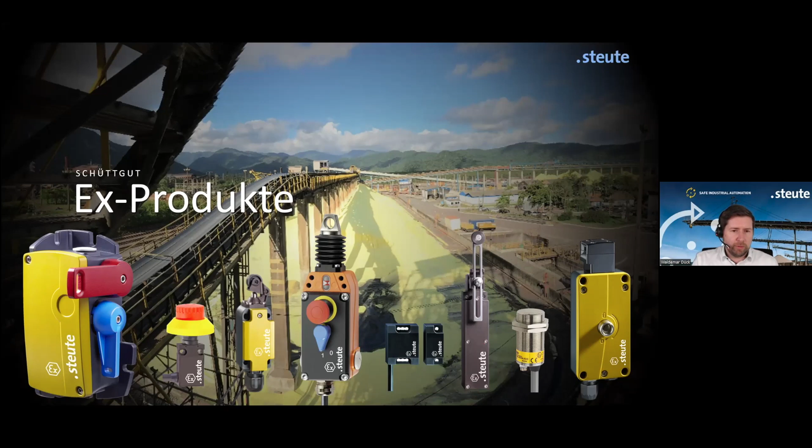Ja, ich hoffe, ich konnte Ihr Interesse wecken und denken Sie daran, wenn Sie Schaltgeräte und Sensoren im Ex-Bereich oder in kritischen Umgebungen benötigen, dann sind Sie bei steute Technologies genau richtig. Vielen herzlichen Dank.